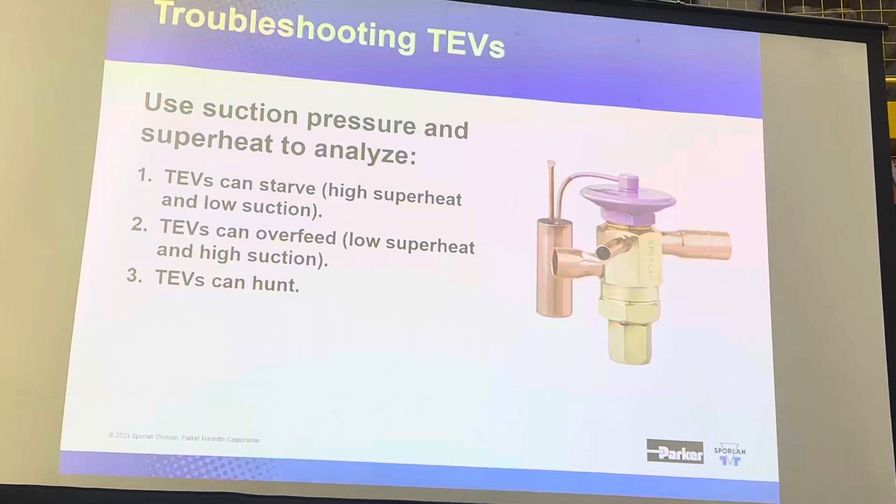Thermostatic expansion valves. These are some of the common...

Am I doing on time here? We're going to run out of time. Yep, anyway. All right, I'll talk faster.

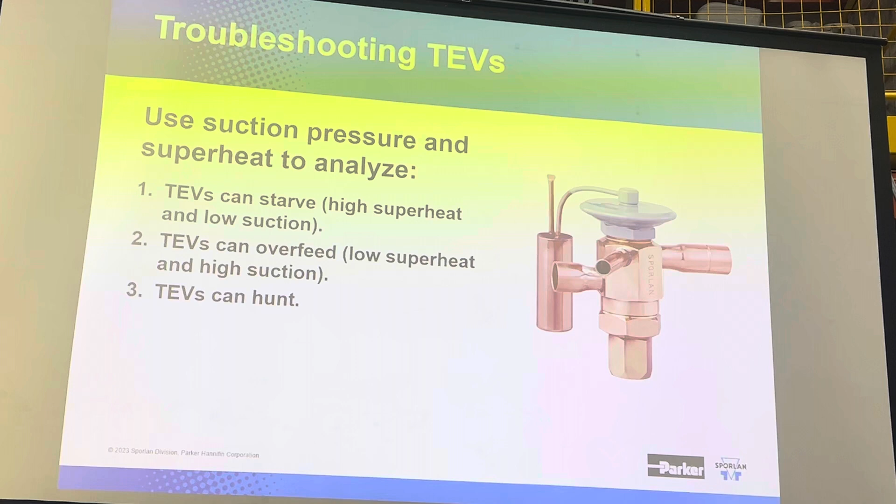Thermostatic expansion valves either don't feed enough refrigerant to the evaporator, or they feed too damn much, or they don't know what the hell they're doing and they're hunting all over the place. Usually that's not the fault of the expansion valve, that's more a fault of choice, installation, and other constraints that I'm going to talk about here in just a moment.

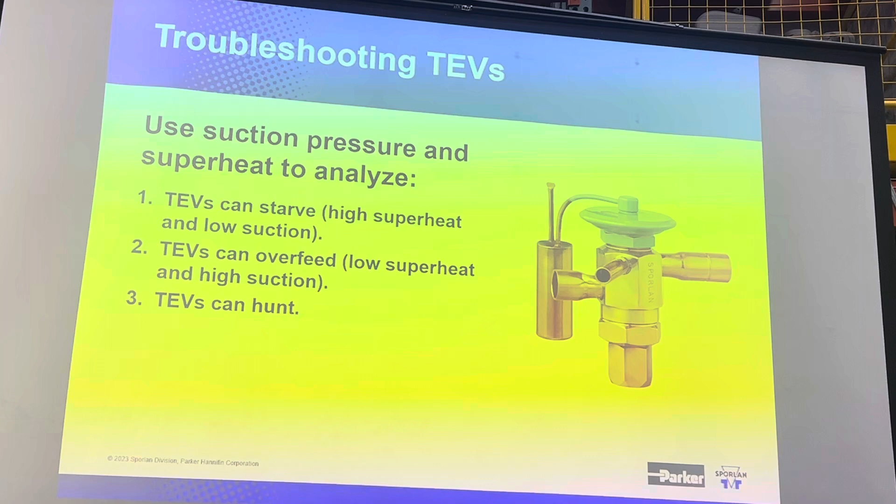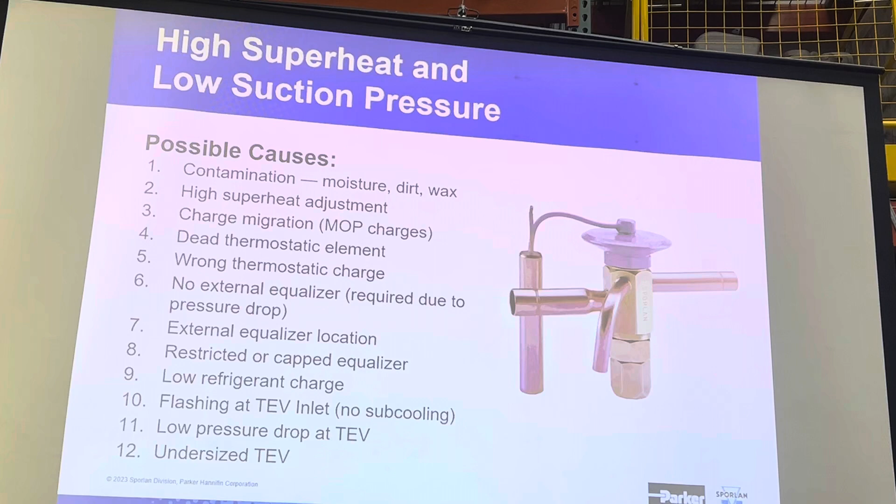What are some of the possible causes? Now, high superheat and low suction pressure might be an indication of that valve not feeding enough refrigerant. Does that make sense? So what can cause it? Well, the single number one problem we encounter on valves that come back to us for inspection is the fact that they're full of crap. That's not because I'm telling the contractor who sent it back to me that he's full of crap. The valve's full of crap.

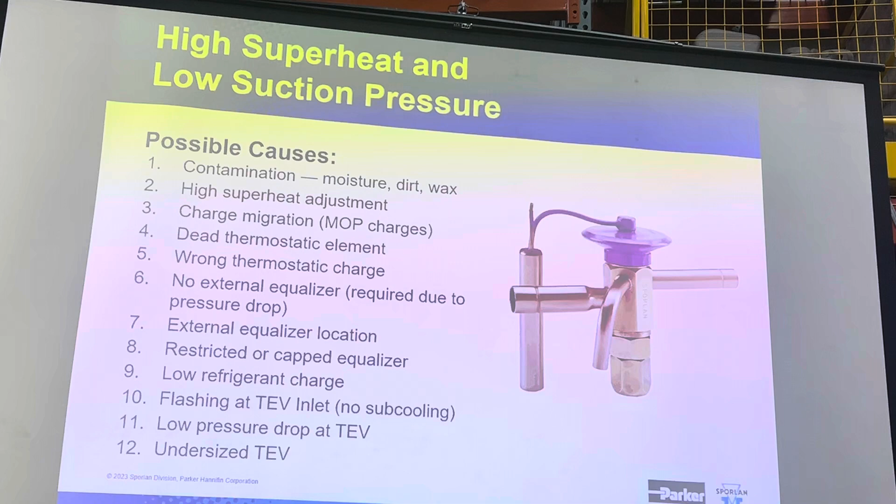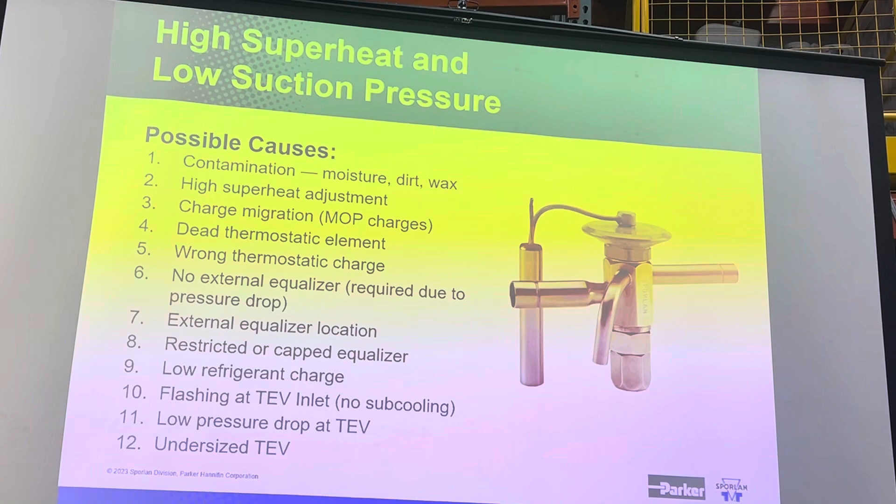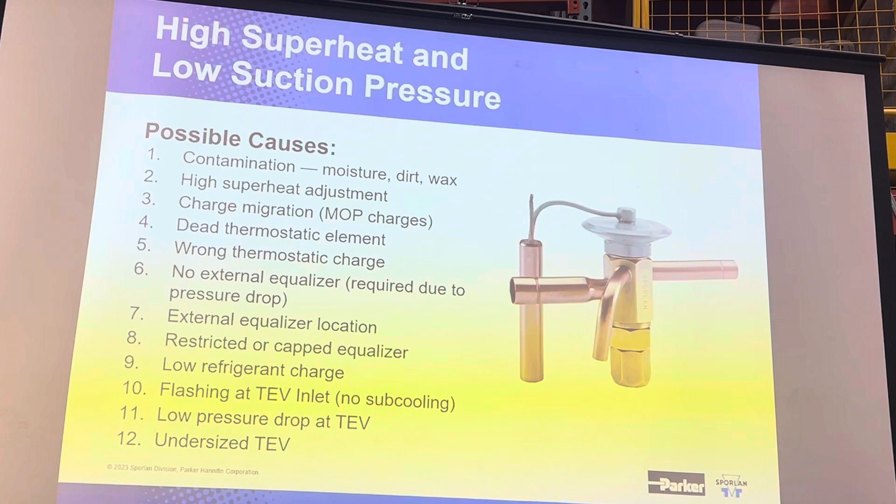Contamination, which can be any of a number of different things. The adjustment on the valve, if it's adjustable, can be incorrect. Now, there's something called charge migration. That's not the charge in the system. That's the magic juice that's in this bulb assembly. If it doesn't stay in the bulb, it doesn't tell the valve what to do correctly. If it finds its way to a colder spot, then it doesn't work. That's what we mean by that.

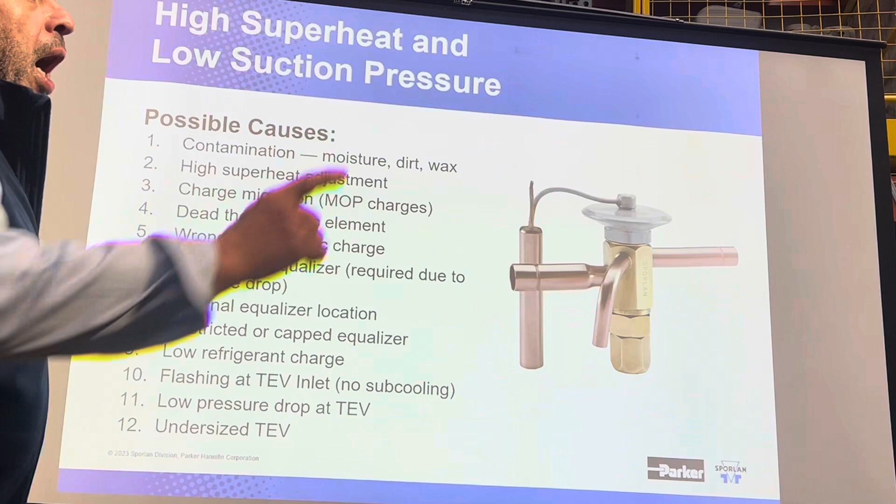Yes? On your sensing bulbs, I know it's always recommended to be in a horizontal application, tail side up, right? I'm glad you asked that question. I'm going to answer that in just a couple of slides. I'm going to tell you what we think here in just a minute. If I don't answer it in a couple slides, you slap me around and tell me I better. Sorry. No, don't have to be. That's a good question. I'm going to answer that.

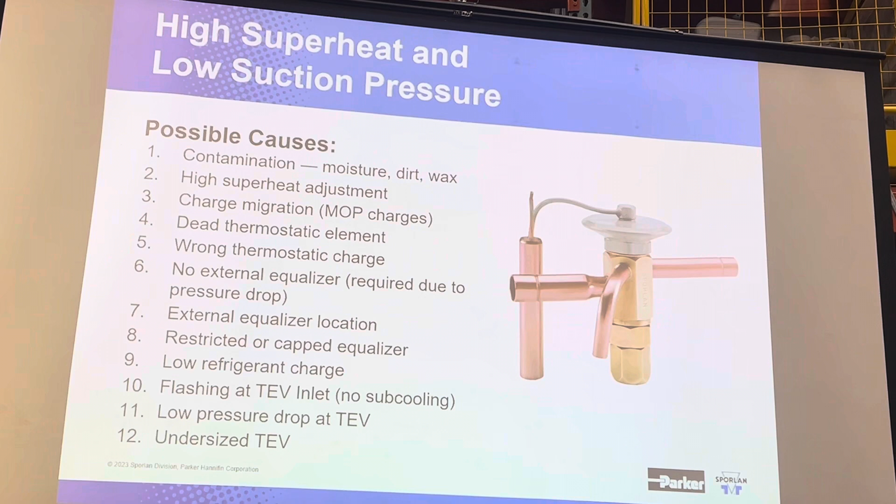But here we've got a whole lineup of things ranging from contamination to the valve not being sized properly, which can contribute to improper operation of the valve. Now, here is more on that charge migration issue. Think of the charge constituent like a refrigerant. What do refrigerants like to do? They like to go to the coldest spot and lay down like a hound dog in the summertime. They want to find the coldest spot to go lay down.

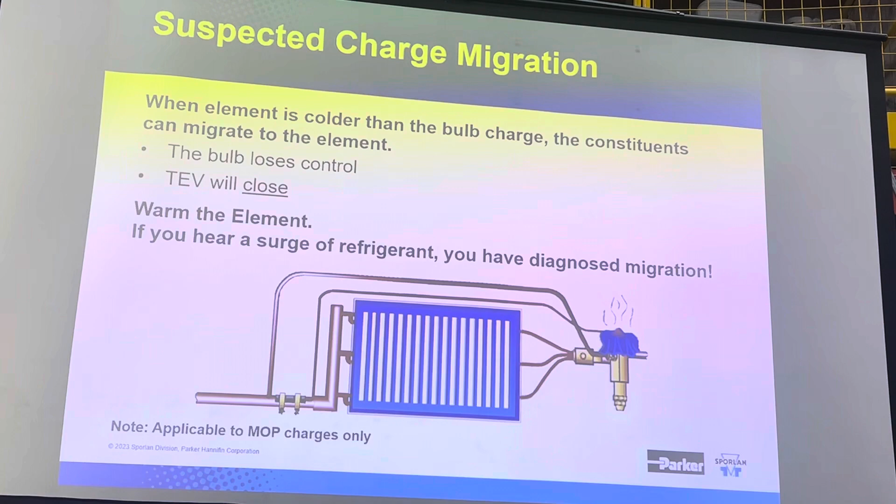So if the head of the valve is the cold spot, which can happen in certain situations, the charge constituents that would be in this bulb can find their way over here. That's a problem if we have an MOP style charge predominantly, and I don't have time to really go into that, but it can happen sometimes. We also see here, it's a good case in point to mount that equalizer downstream from the bulb location for a number of reasons. Now, here is...